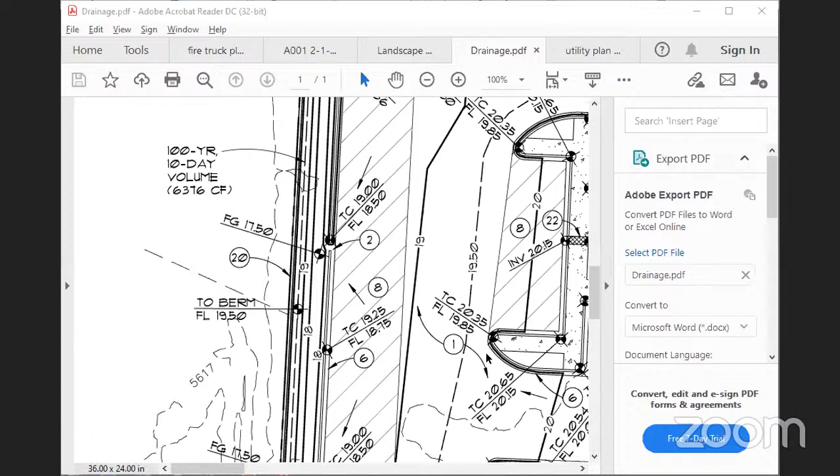I'm sorry, I didn't get all of that. There's a little bit of feedback going on. So all of the water collecting in these ponds is going to be going down to where there's the gutter, if you will, where all of the water is released into. Right, yes, that's correct. Okay.

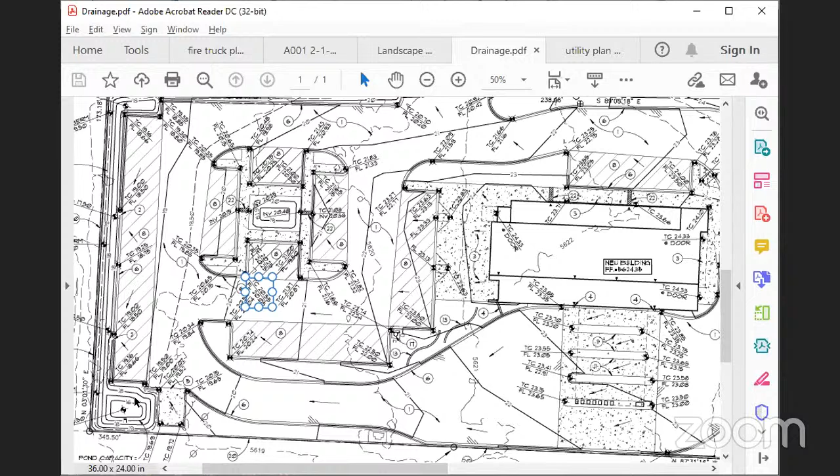Director Hubler has placed the plan on the screen if you need to refer to that. How big are the holding ponds being built? I'm sorry, how big are the ponds that are being built, the retaining ponds, the rain ponds if you will? How big are those? If you have access to the screen, Director Hubler has posted that up there so you can see.

There's a dashed line that indicates the extent of the 100-year storm volume, but the majority of the ponds are right next to the west border of the property. Okay, where the arrow is going around? Yeah, okay.

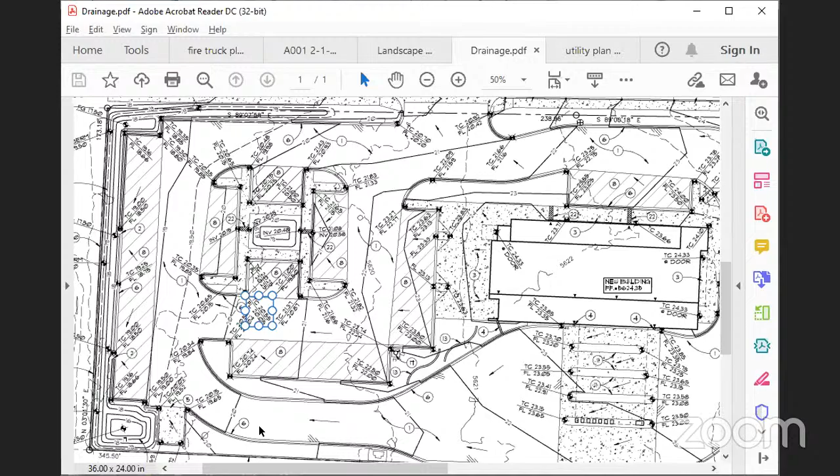Do we have any others? I thought I saw someone else coming on. And then I see our city manager, Javier Martinez, on the line too. I'm sorry for not recognizing you, City Manager Martinez, but thank you for being with us. Thank you, Commissioner Martinez. Pleasure to be here.

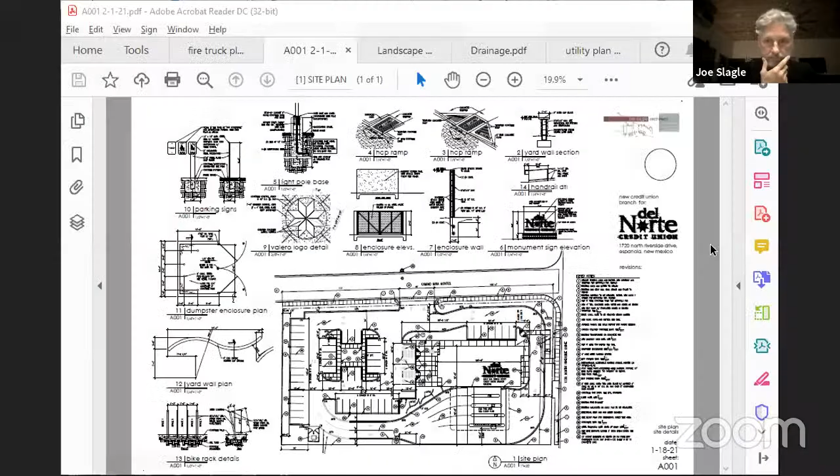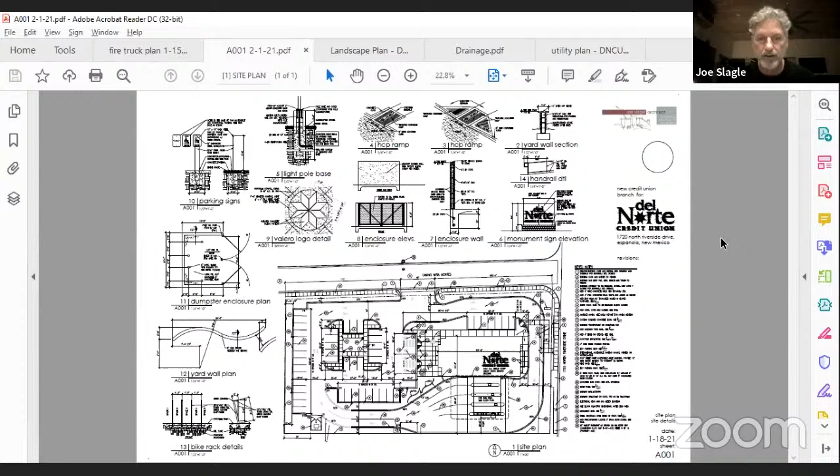So what I would like to do, Richard, if you would, could you screen share the site plan, please? And then I can kind of just go through the things that we've adjusted since the last meeting. Mr. Slagle, do you expect Mr. Wilger to provide any testimony? I don't know if he would. Is there anything any of the commissioners would have questions for the contractor about? I don't think so. If we do, or if we have questions for him, we'll swear him in prior. Okay, all right, thank you Richard. If you would, please, yeah, zoom in a little bit.

Okay, very good. So just quickly, the concerns from last time, I'd like to start at the top and make my way down to describe what we've done. The first one, we had a concern last time that the driveway location on the north side was lining up with one of the property owners on the other side of Miramonte. We've adjusted the entire site to move that driveway to the east to adequately displace it from being directly across from their driveway.

So hopefully this will alleviate that concern. The other concern from the property owner on the west, they wanted more buffering on the west side. We've added a concrete block wall 6 feet high, and we've also increased the distance from the parking to the property line, which is now over 10 feet. That's a landscape buffer and ponding area with a concrete block buffer wall to the west. I think those were the two neighbors that had commented last week, and I think we've addressed those comments.

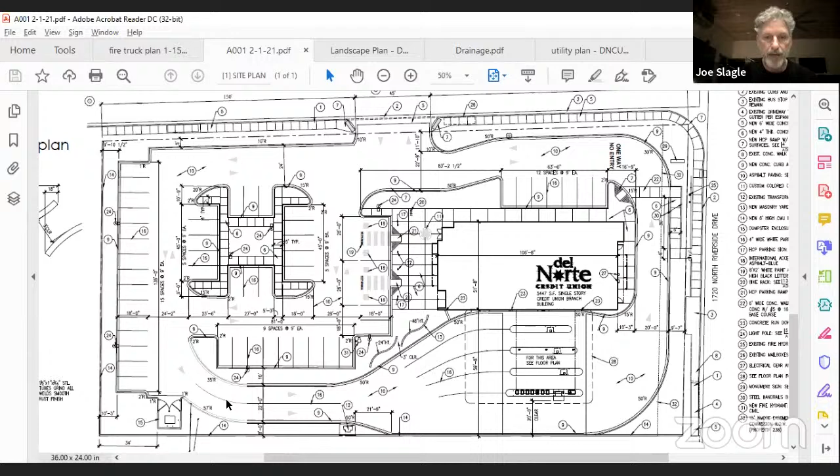Moving further to the south, there was some concern about the backup at the drive-through lane. We've widened the drive-through access aisle to 20 feet. I think that was one of the commissioner's suggestions, allowing 2 lanes of traffic through the access drive to the drive-through lanes, which has increased our drive-through capacity and backup capacity significantly.

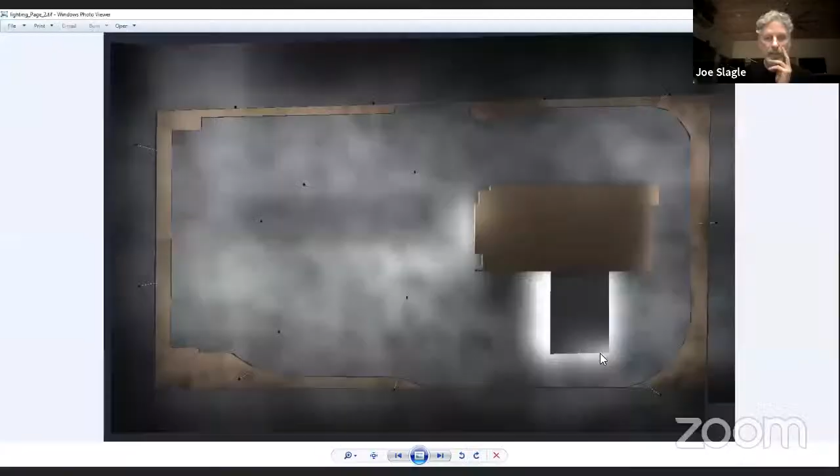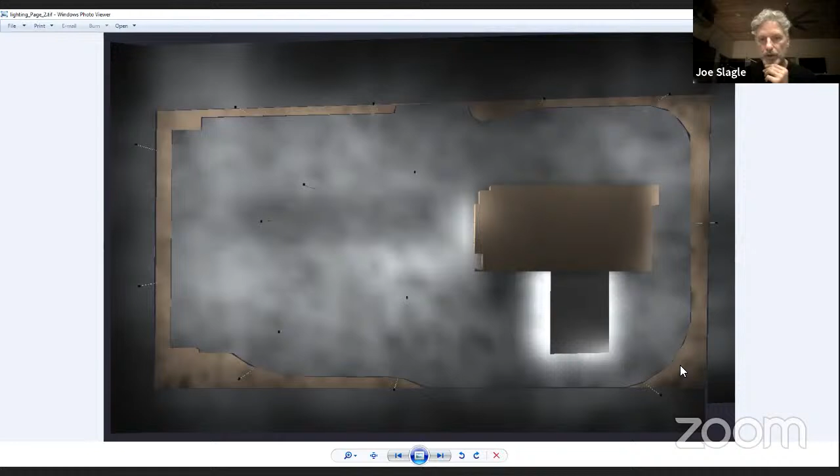Let's see, some of the other concerns were lighting. I wanted to make sure that we had adequate lighting on the property and also had cutoff ability for those light fixtures on our poles so that they don't spill off onto neighboring properties. We have a photometric that was done that addresses that problem. You can see there's our photometric, showing the lighting levels that would occur on the property. On the west side and south side, it is cut off. There's some that bleeds a little onto the street and a little onto Riverside, but the lighting is contained within our property.

I think that, other than the grading concerns, addresses the problems. There was one comment on the landscape plan about buffering on the west side and also adding a tree at the bus station, and we have done that. So we've added a shade tree at the bus stop. I believe one of the commissioners had that concern.

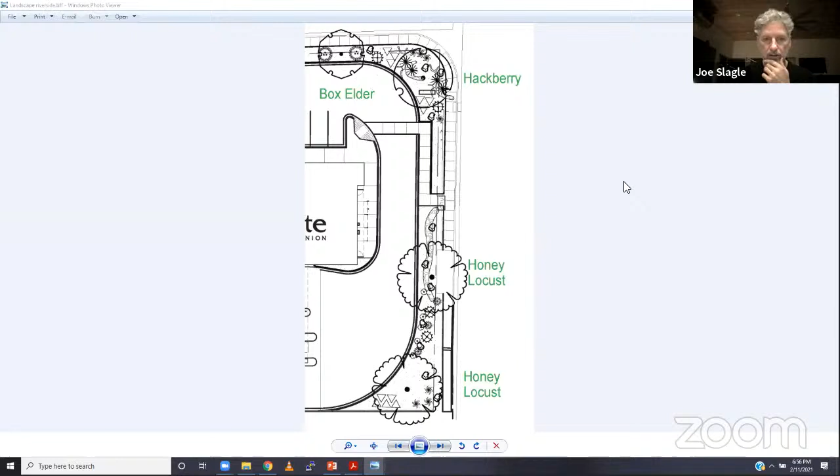I believe that addresses the concerns that I'm aware of. If there are others that I missed, please bring those up. But with that, I'll open the floor for questions.

Thank you, Mr. Slagle. Appreciate that. I do see here on my list that the mailbox relocation was another issue, and maybe Director Hubler might be speaking to that too. Is that correct? Yeah, I'll be speaking to the mailboxes.

Thank you, Mr. Slagle. I'll go ahead and ask the commission if they have any questions for you. We'll start with Commissioner Martinez. Thank you, Mr. Chair. I have a question on the signage plan, but I think Director Hubler may be able to answer that question with his presentation, so I will wait.

Commissioner Casalos, do you have any questions? Mr. Chair, not at this time. Thank you, Commissioner Casalos. Commissioner Vigil? Mr. Chair, no questions, no concerns.

Commissioner Wright. Yes, Mr. Chair. I'm looking at the landscape plan that shows the vehicle stacking. For the record, could you say what size vehicles were used to illustrate that? Yeah, those are 18 feet long. Okay.

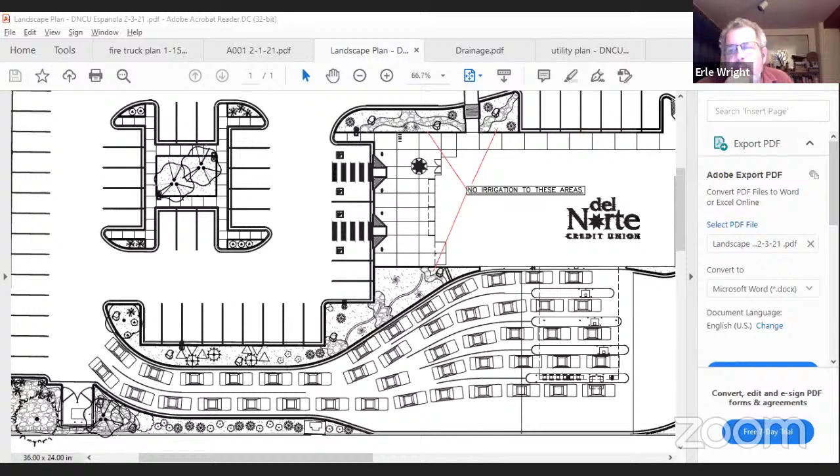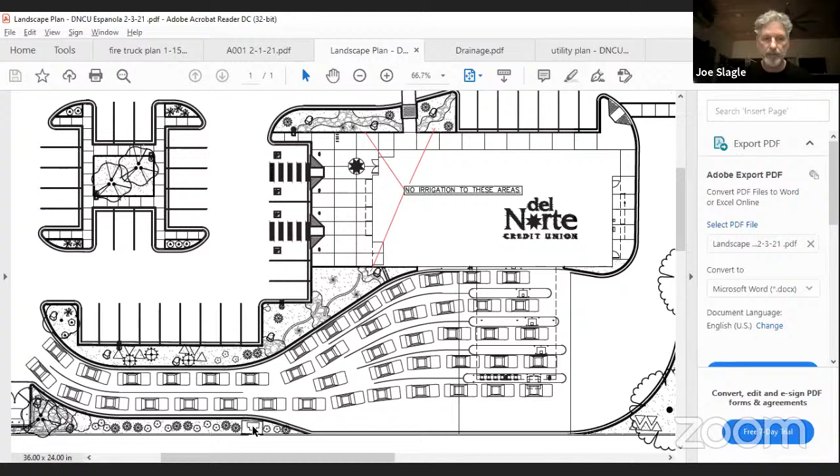Oh, I see what you're saying. In the double lane aisle approaching the drive-throughs, yes, the south lane. It could either be—what you're looking at is an extreme. I don't know if we'd ever get to this point, but the south lane could be used if you turn right and went on out. It could be a bypass lane, so it could be used as either. Obviously, we can't pull that back any further. Just to the left of the southernmost, where the cursor is, that's an existing transformer, and that is limiting the widening of our lane right there. So that's something we had to work around.

Understood, I realize there are site constraints there. But so the intention is to allow stacking in both of those lanes? If it's required, that's correct—in a very, very busy situation.

I don't know, I guess it'll be a question for staff coming up, but I would almost like to see that actually painted as pass-through only, or indicated that way. Because as your plan shows, that's only providing access to what I assume is an ATM station—is the fifth station out? The southernmost drive-through is an ATM, that's correct. Okay, so again, not like a fast food restaurant—that'll actually be a pretty quick transaction for the most part, either deposit or withdrawal of cash, so that should be pretty quick flow. That's correct, yeah, I don't think you're ever going to see that much backup behind an ATM.

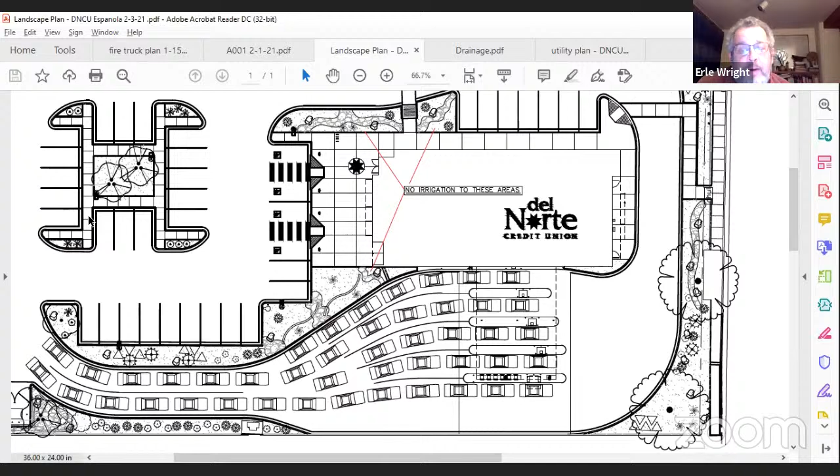I've actually seen them during these COVID days because the banks have been closed. It's a problem we've seen manifest in other developments in the city, even at the branch on the west side of town, where the backup flows into the parking lot and people are unable to leave their parking spot because of vehicle stacking at some of these drive-through locations. But this is good, there's 4 windows and an ATM, so I definitely appreciate the improvement from the last plan. Thank you for that.

Yes, sir. And also appreciate the consideration for putting the shade tree adjacent to the bus stop there. I think that will be very helpful for the community.

I am a little concerned about the retention area still, and the ponding and the landscaping there. Did any of the plant materials change on that west side from this plan to the other?

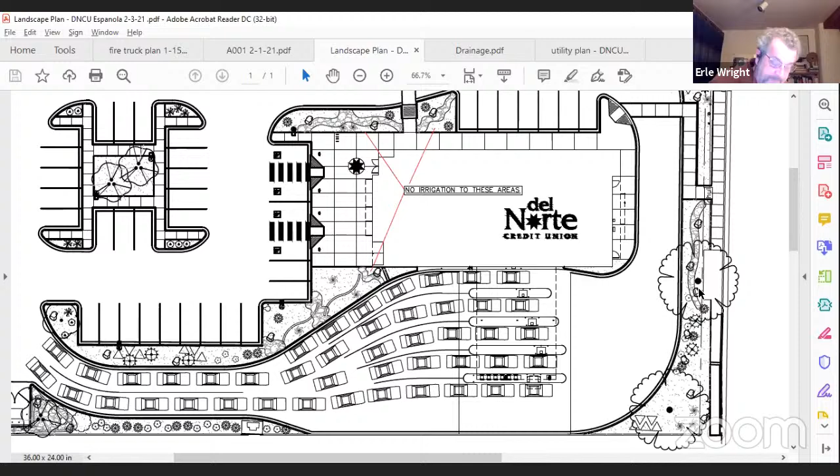I'm sorry, I'm rattling my papers again. Richard, can you pan to the left a little bit? Thank you. Yeah, there's been some plant material added on that west side to help buffer that ponding area. I think you can see there's more room over there now, so there's been some more plant material added in there.

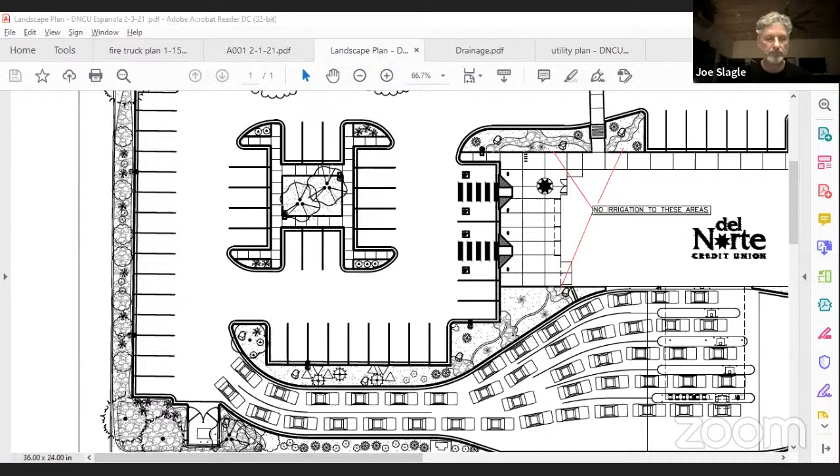Yeah, so I guess I'm a little confused. The gray is stone pavers, I suppose? Yes, that's gravel and gravel over riprap. Okay, gotcha. Right. And so the actual plant material...

I'm still having trouble identifying it. Yeah, I don't have it at that end. I think it's the curl leaf mahoganies, or mountain mahoganies? I believe that's correct.

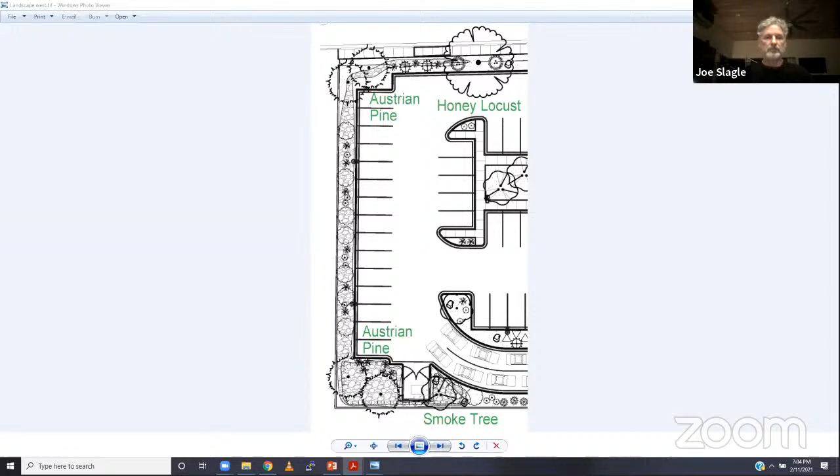And again, are those suitable for saturation in the retention pond? Well, we've asked our landscape architect that designed this, and we've informed him that that's a pond. I'm not a landscape architect, so I've got to rely on his expertise. He indicated he would provide plant material appropriate for that location.

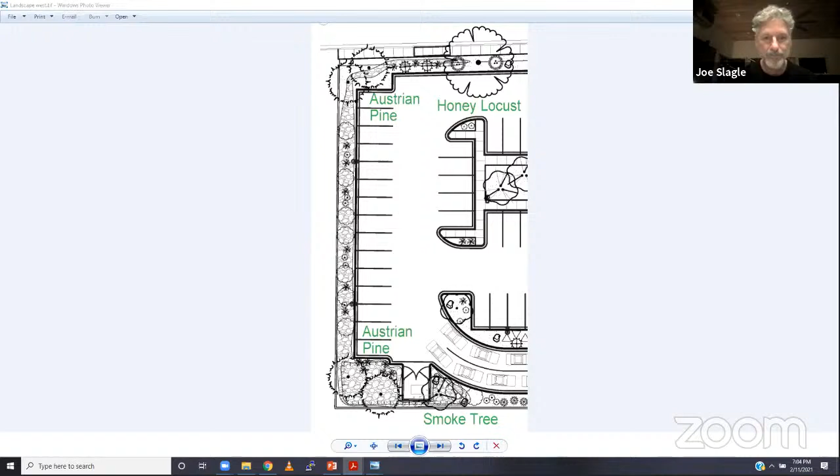Okay, well, sorry, that was a little tough question, but I'm not sure myself. It's indicated as low water usage, but it could end up being saturated. But I guess that concludes my questions, Mr. Chair, for the applicant.

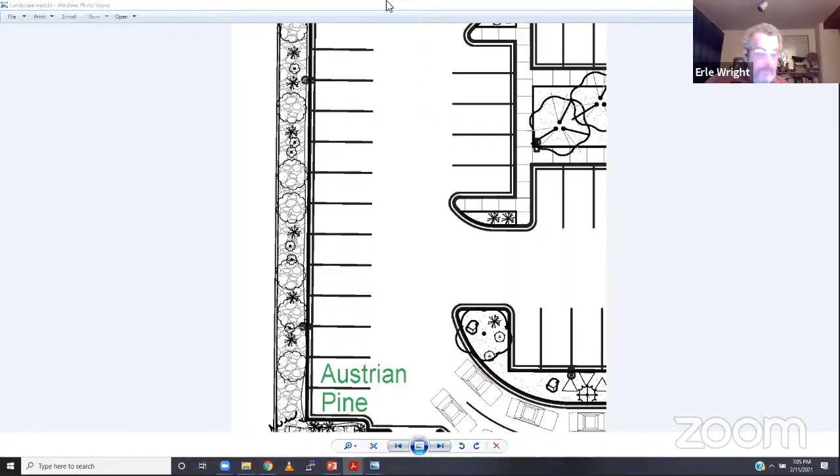They ran through all the commissioners, am I correct? So just me, I'm the only one left. I don't have any questions, Mr. Slagle, but I do still share some concerns about the stormwater, given the underground geotechnical conditions. I'll reserve more questions for staff on the potential solutions there. So if there's no further questions from staff or the commission, I'll move on to questions from staff for the applicant. I have no questions for Mr. Slagle. Thank you, Director.

All right, we'll go ahead and jump to the neighboring property owners. If you have any questions for Mr. Slagle or his team, we'll start with you again, Ms. Hicks and Ms. Martinez. Can I look at the north side where the exit is? I couldn't quite see the fire hydrant, I just want to see where that aligns. Director Huber is working on that right now.

Back up on you. Give us a second here. I did have another question too. Okay, so there's the main entry. Yeah, it's still pretty close to across from where my house is. I don't know if you see that, where my driveway is.

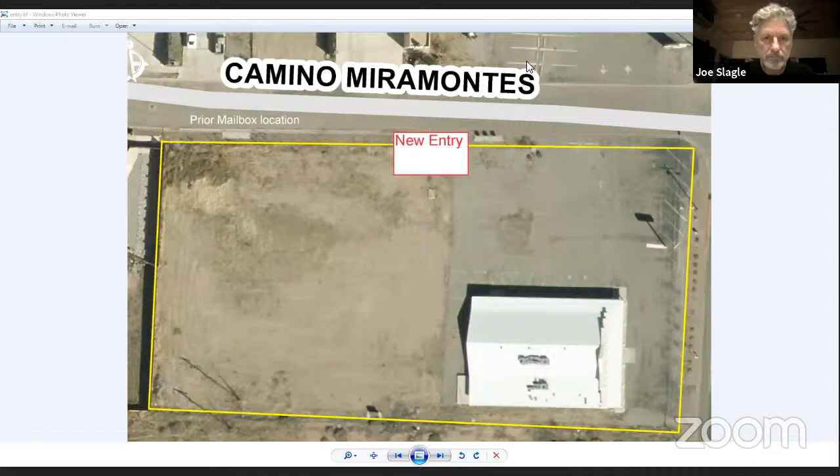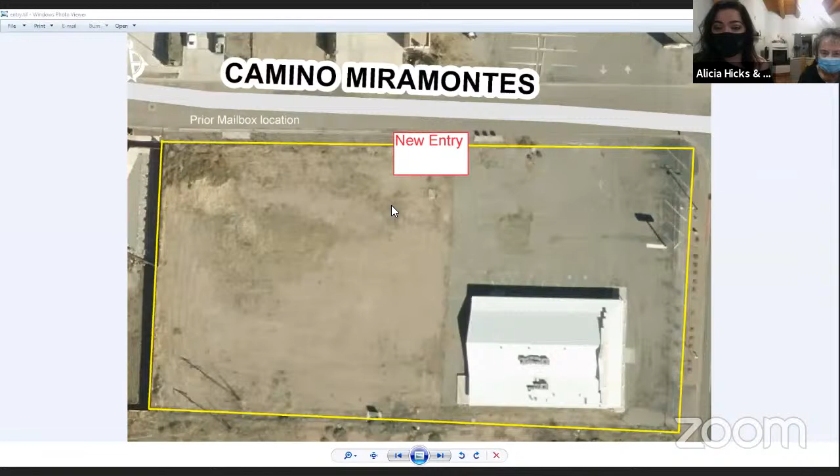It looks better. Obviously though, if you're looking at probably, on average, 30 vehicles coming in and out in a 10-hour span per day of an average work day, that's 300 extra vehicles per day going in and out of there.

And you said there was no way you could get the exit onto Riverside. That's correct. Our first site plan showed a driveway onto Riverside, and I share that concern, but we were unequivocally denied that by the New Mexico Department of Transportation. So that's out of our control.

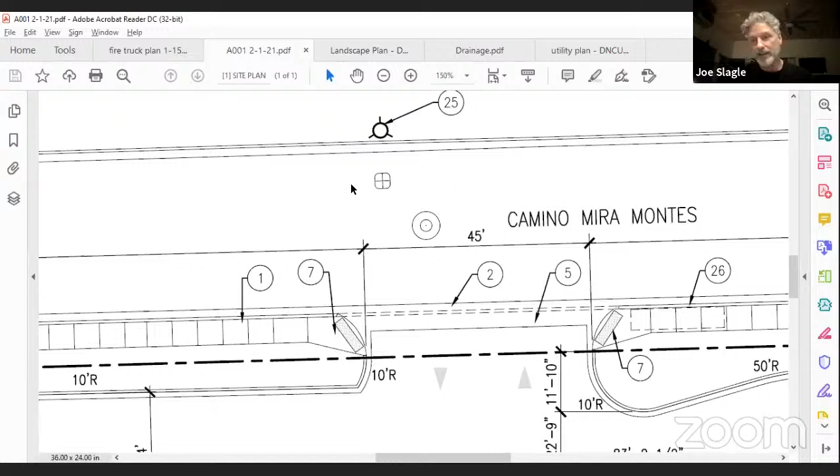So that is actually further west than that. Actually, the other image that you showed is pretty accurate then. There's no way to move that over just a tad? Because if you look, that lines up pretty much right with my driveway.

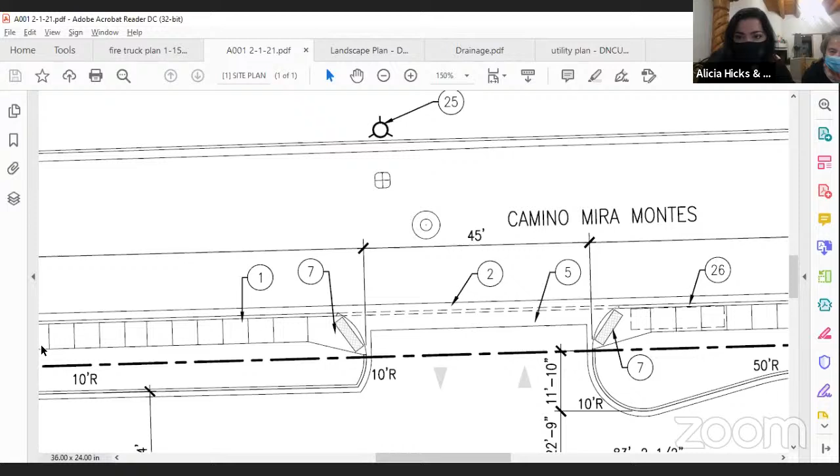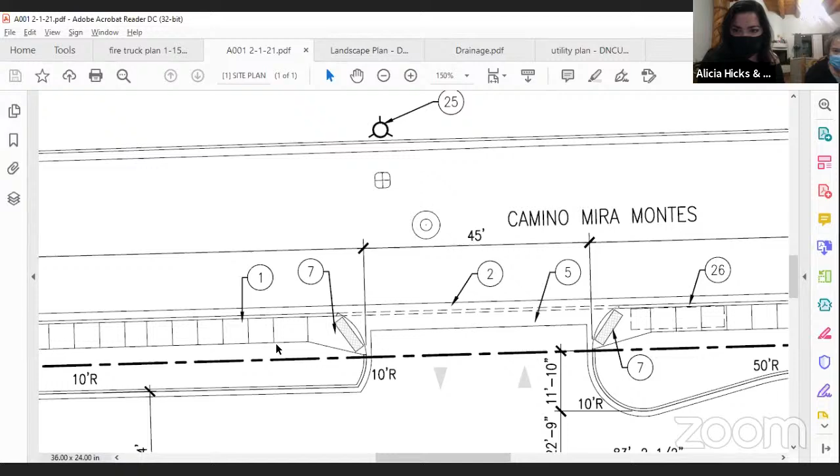People are going to be, you know, if I get a package delivered to my front door—not saying that the people who bank there, because I bank there, are going to do bad—but people might want to take that package, you know what I mean, seeing something there at my front door. So is there any way to obscure that view just a bit of my front driveway, without me having to be inconvenienced building a fence and all kinds of stuff out of my pocket, having that expense?

We got the landscape plan showing the trees and the landscaping scheme on the screen right now. I don't know if you want to address that, Mr. Slagle, and how that might provide some additional buffering.

The only thing I can say is that based on that concern, we pretty much redesigned the entire site, moved the building, moved the parking, moved the driveway, and completely redesigned the grading plan to accommodate that request. As we push that driveway further east, we lose parking spaces, and we're down to pretty much the minimum number of parking spaces that Del Norte feels comfortable having without people parking out on the street. I think we've made a genuine effort to accommodate that requirement, and I'm not sure what else we can do from this point forward.

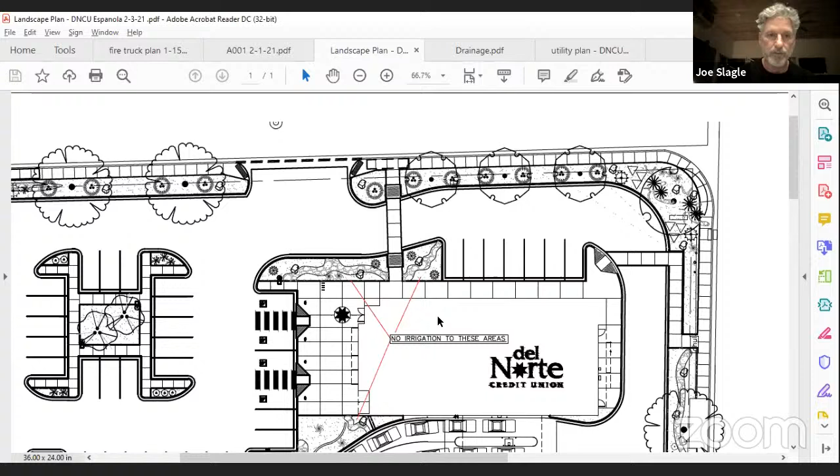This is Dave Whitehour with Del Norte. Can I just make a comment about the redesign? I appreciate the redesign, I'm just saying, is there any way to obscure more of what people can see? I do see that you guys put trees and landscaping and stuff, but I still feel like people have a real easy line of sight to my front, not only my front door, but my front window. If you actually look at an aerial view, you can see my front window, and I will be able to see right into what cars are coming in and out of Del Norte, based off of where my front window is by my kitchen.

And I appreciate your concerns. I just want to give a little context here. Del Norte is a not-for-profit organization, so the funds we're using to build this branch come from our members, and we have a fiduciary responsibility to be responsible with them. The adjustments we made to this plan are adding an additional $220,000 to the price tag of this branch, and we've gone through this process now, this will be the third iteration of going through this. We've tried really hard to accommodate everybody's concerns, but we're at a point right now where if we have to continue making revisions, it's not going to be feasible for us to move forward with the project. That would be really unfortunate, because our members in Espanola have been asking for another branch because we've outgrown the other one. So I just want everybody to understand, we're not a bank, we can't sell stock to get additional capital to make all these changes. We're at the very high end of our budget right now, and I'm just afraid if we keep adjusting, it won't be feasible for us to do this anymore.

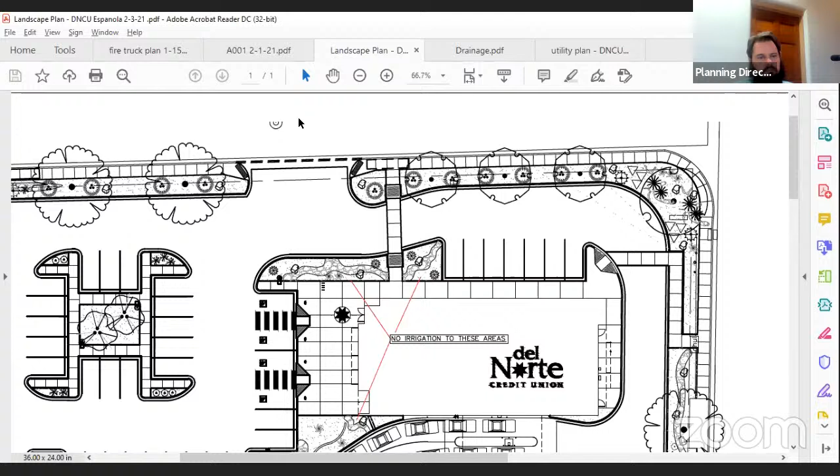We can look at it. I don't know how we would do that without obscuring people's line of sight for coming in and out of that ingress egress. I don't want to make it so that their line of sight is obscured for traffic.

Well, their line of sight would- I mean, if you put like a bush there, but I get what you're saying. But if they're exiting, they're going to be on the far right side. I'm talking about if you're looking at the north west side of that entrance and exit, having something there to obscure them from seeing my yard.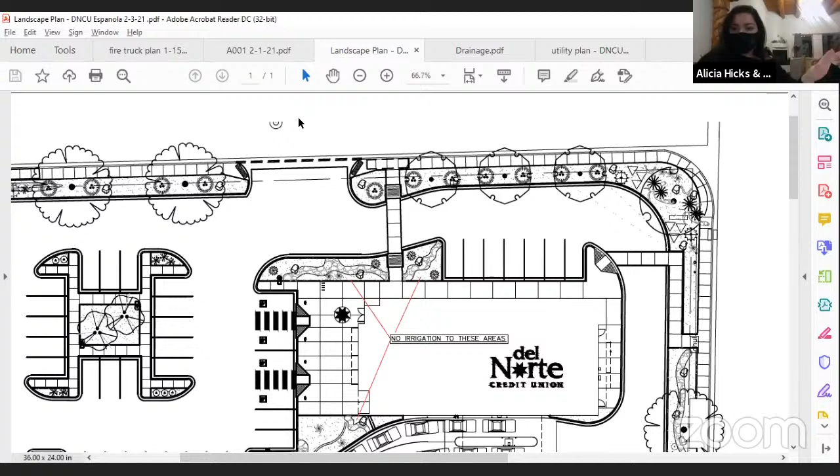There's actually 3 properties right there across that whole north side that needs something kind of buffering, whether it's plants, bushes, whatever. This looks like 2 big trees and that's it. No, there's shrubs underneath those trees. We've got shrubs, maybe you'll not be able to see them, but there's two.

I can see the shrubs, but in between that, I don't see anything. And then I don't see anything close to the entrance here. So that's like a clear view of my house, is what I'm saying.

You're maybe speaking more of like a hedge. Yeah. Something to obscure people from seeing my house, and seeing if I'm home or not. Something like a hedge that's continuous is what I'm hearing. Yeah. Okay.

Well, if that's something that can be considered, it doesn't sound like I'm hearing any kind of commitment or answer from the applicant. So for the sake of time, we'd like to move on to additional questions, unless Mr. Slagle or Mr. Whitehour would like to conclude anything on that point.

I mean, we can take a look at it. I just don't- I just don't want to obscure the ingress egress line of sight.

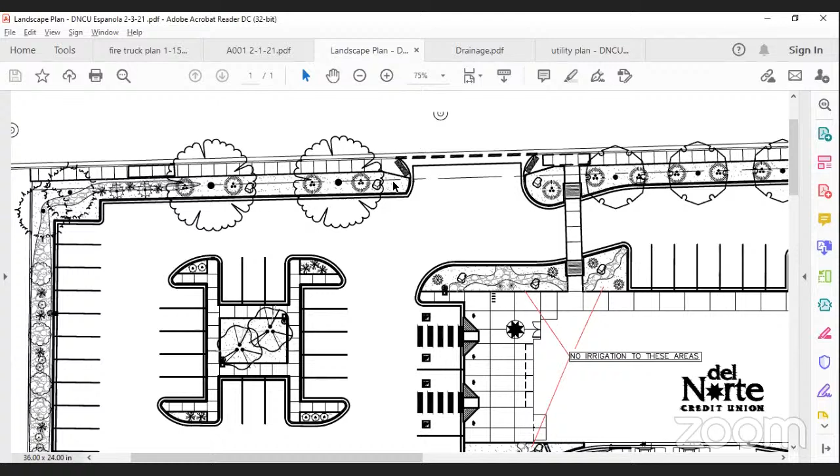Okay, Ms. Hicks or Ms. Martinez, do you have additional questions you might want to ask the applicant? I have a question. The space that's allocated for ingress egress, does that allow for only 1 car entering and 1 car exiting?

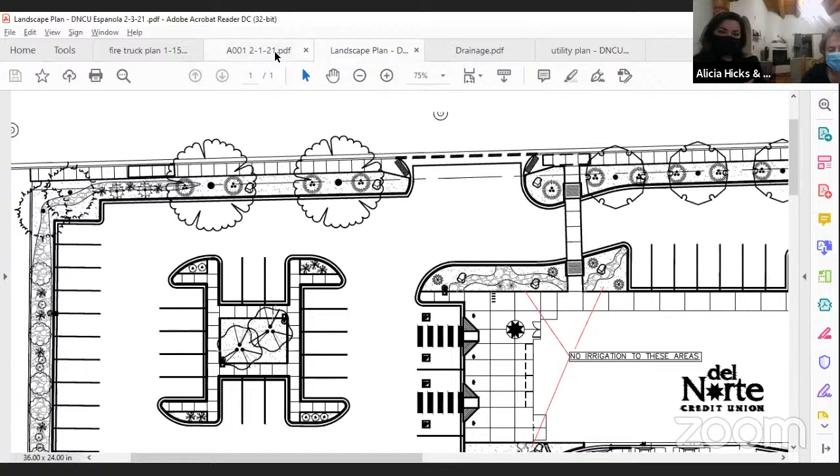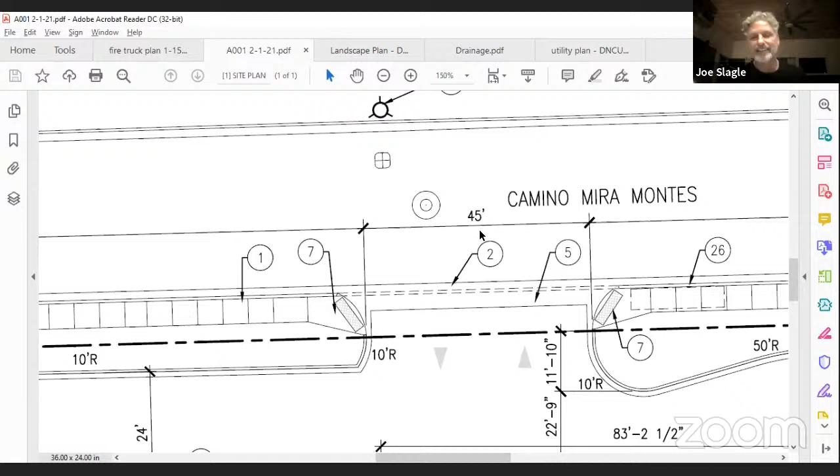Yes. So people exiting and making a right, will there be a stop sign there? No, there's no stop sign planned right there. So it's a free-for-all kind of thing. That's your condition - I believe the city has a condition for a stop sign to be installed. Doesn't necessarily require one, but it has been done just to help.

So my other question is, what is the distance between the exit lane and the stop sign at the corner of Mira Montes and Riverside Drive? 152 feet. Excuse me? 160 feet. Which is- 152 feet. Oh, 52. It's right there. Which is the equivalent to how many cars?

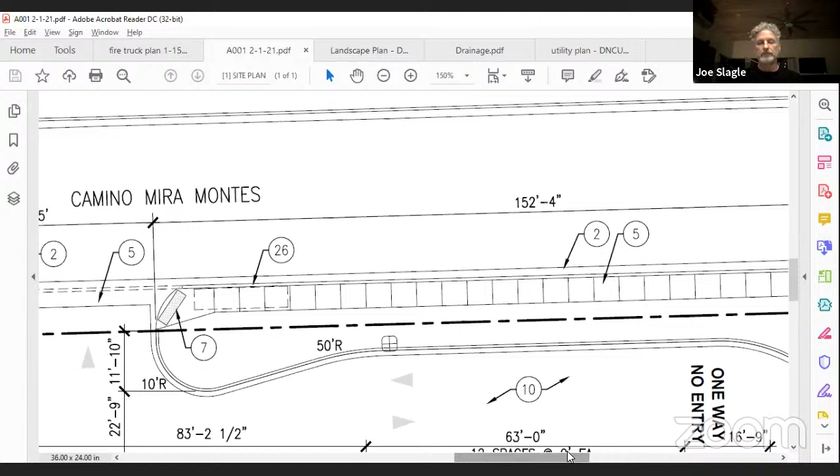You allow for about 20 feet per car. So that's what, 75 cars? No, no, 7 cars. I'm sorry, 8 cars. 7, 8 cars. How many? 6, 7 cars. You said 20 feet per car? Yeah, I think that's like 8 cars, that's like 7 or 8, depending on if it's a truck or a vehicle.

Well, I guess there's enough space. I'm thinking about the back lot. Okay, that was my question. All right, thank you.

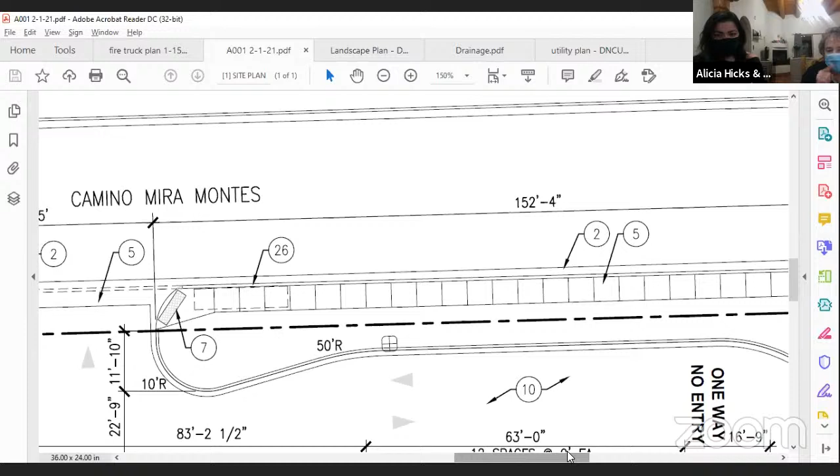Any others? I have another question. So everybody that's at the drive up needs to go around the building on the east side and partially on the north side to exit, is that correct? It's the same exit and entrance. Yeah, so there's one exit, one entrance, they go around this way, around the building to exit?

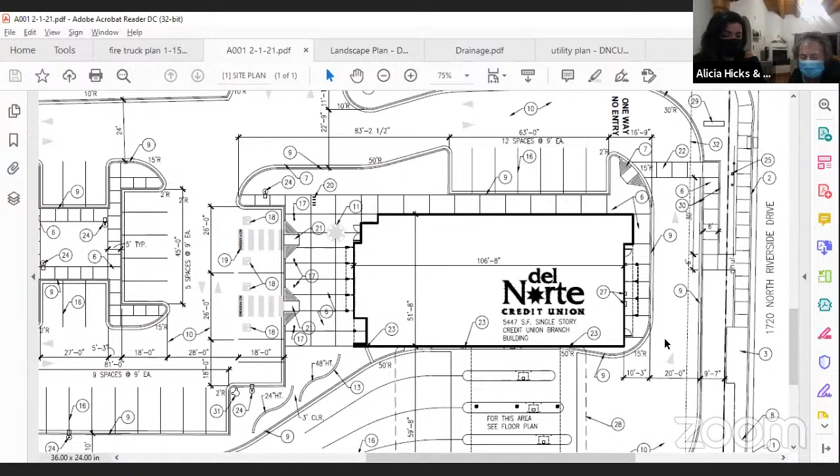Yeah, okay. So, and there's how many lanes? 5? It's like 5, there's a lot of lanes. Yeah, okay. There's 4. Okay, 4 lanes. I have no more questions. Okay, thank you.

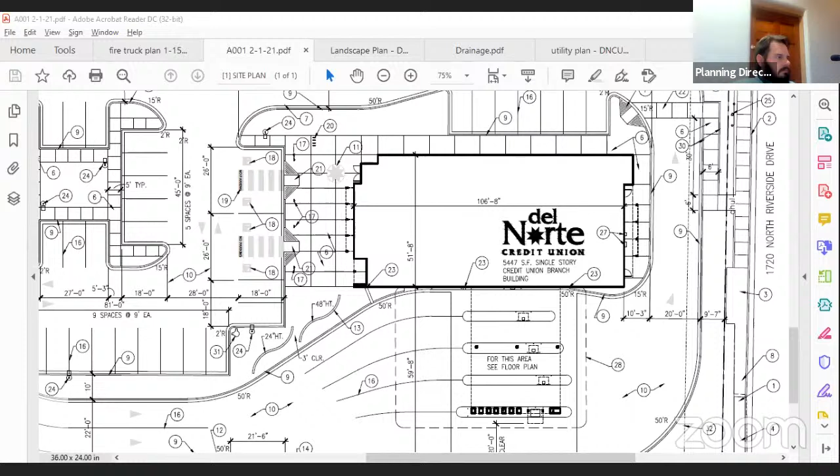Let's see what I got next on my list here. Mr. Lujan, do you have any questions for the applicant at this time? Yes, sir, I'm just curious. So on Camino Mira Montes, is that the entrance or just the exit for the bank?

That's both, that's our main driveway. What about on Riverside? Is there an entrance on the Riverside side of the property? No, we originally proposed that - you may not have been part of that discussion - that was denied by the New Mexico Department of Transportation. The Highway Department would not allow us to have a driveway directly onto Riverside. Did they say why?

I don't remember the exact reason, Richard, maybe you can step in. I'm not sure exactly what the reason was, but they're not allowing them anymore. I don't think any new development on Riverside is allowed to have a driveway directly onto Riverside, but I'm not sure what the reason is. I don't know if it's causing congestion or problems they've had in the past. I know every property along there has them now, including this one, which we're having to close up. So we had assumed we would get that driveway, but as we were going through the approval process, we were informed we weren't going to be allowed to have it. I'd just be curious to know the reasoning behind it.

I work for NMDOT in traffic safety, so if I can be of any help to speak with anybody to get more information regarding why they denied it, I will. My main concern is that our neighborhood is basically one huge cul-de-sac, and the only entrance and exit is on Camino Mira Montes. It's going to create a lot of traffic in our neighborhood, and there are a lot of kids that play on our street. So how will the credit union control the amount of traffic flow on our street? There are a lot of small children and families walking up and down. What can the credit union do to keep our neighborhood safer from the increased traffic?

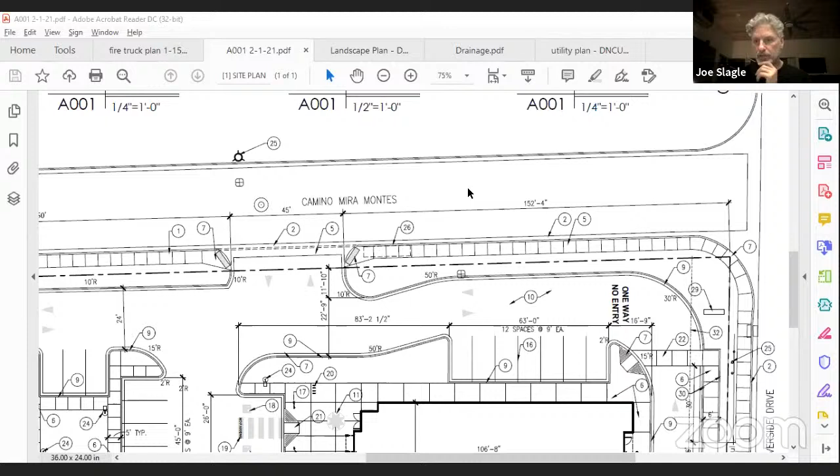John Wilger, if you're still on—yeah. I know you had some discussions with someone at NMDOT. Maybe you could weigh in on what the reasoning was.

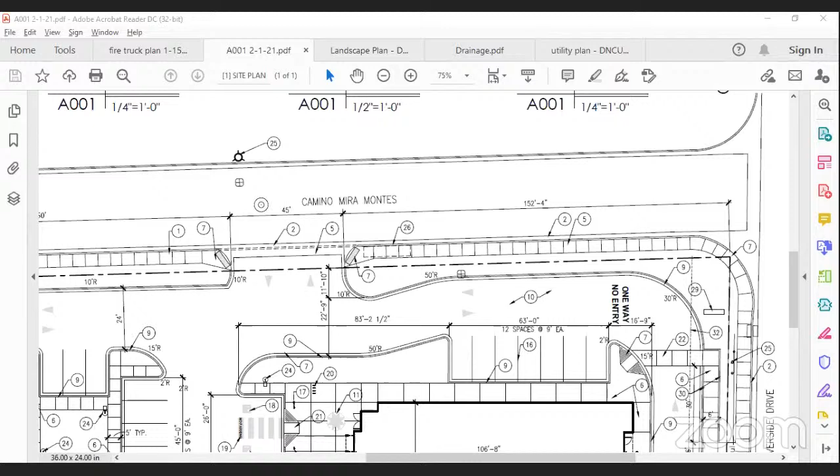No, I just share the same concerns as the others, as the safety. I've been in this neighborhood for 20 years, and my kids have grown here and still continue to grow, and we have a very growing family, if you will, in this cul-de-sac alone, and it just raises a lot of safety concerns. I'm a nurse in the emergency room, and I too can attest to many traffic accidents that happen when we seem to bottleneck traffic the way that it will be at the end of our road.

Okay, thank you. All right, thank you, Mr. Slagle and Mr. Widauer, appreciate it. We'll go ahead and move on. I think I captured everybody on the screen here. So we'll go on to the staff presentation. Director Hubler.

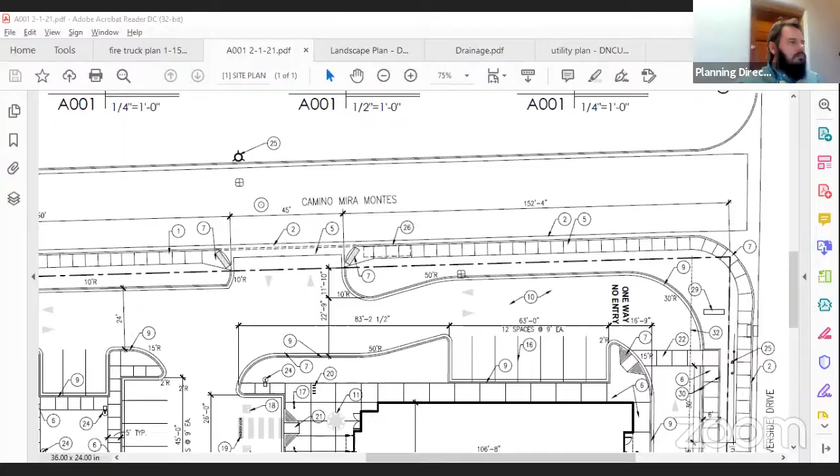Mr. Chair, thank you. I'll run through a number of items here and then comment on a couple of the questions. Apologies, I was noting them, but if I miss any of them, please feel free to ask me again. As indicated before, this is a revisit of a site plan to install a credit union with drive-through branches, or drive-through lanes rather.

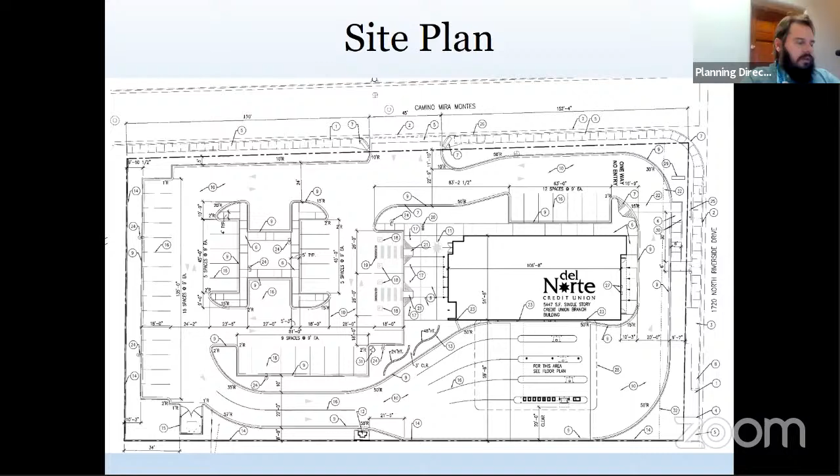This site plan, as Mr. Slagle indicated, has been adjusted. You can see the parking island change shape a little bit. The pathway for the traffic has been expanded to allow for more stacking along the drive-through lanes, even excluding, if we were to stripe that far south lane as an ATM-only lane. Not saying that drivers in this community would follow those directions, but it's worth a shot. Even taking those cars out of the stacking diagram, we still have 30 to 31 average vehicles entirely within the drive-through and out of the parking lot, which I think was a major consideration of the last time.

So as indicated, that drive has been widened to 22 feet to allow the double stack, with a total potential of 45 vehicles, including a long line for the ATM or for folks bypassing the line, as will likely be the case. The entrance to the street is 45 feet wide. So the question was asked if it allowed entrance and exit. It's designed for one vehicle at a time, but that's a very wide entrance, and that's on purpose to allow for maneuverability, particularly of the ladder truck. We'll see that diagram on the bottom here.

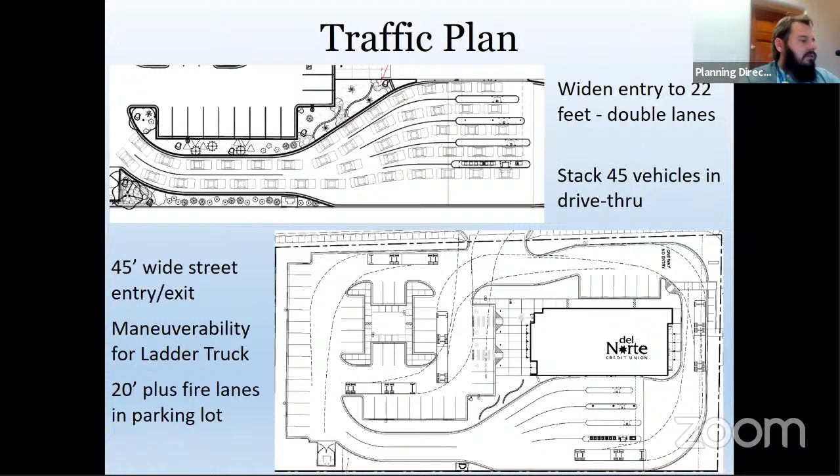This is the updated version. Apologies, the incorrect version was placed in the packet. It showed the old drive-through island, but the applicant did provide an updated version showing that the ladder truck, which is the largest vehicle that the fire department has, in kind of the worst case scenario, would be able to adequately respond. There is at least 20 foot wide drive lanes as it goes through the entire development.

The landscaping was enhanced. It exceeds, just as before, the code minimums. It does include landscaping in the parking island. There is, as discussed prior, a new shade tree by the bus stop.

I had a conversation with Delilah Garcia from NCRTD related to that bus stop. She indicated that they're going to petition DOT to put in one of their shelters at that location as well. Right now it's just a bench. She thought this would be a good time to upgrade that stop, and had no concerns other than general maintenance concerns.

Thankfully, the tree that's going there is a honey locust, which does not produce a lot of leaf detritus. And as indicated, this is one of our conditions: landscaping is always the responsibility of the developer, the property owner, basically adjacent.

So even though the public would benefit from that shade, the landscaping, maintenance, and upkeep would fall to Del Norte. There is, as we discussed prior, a deeper buffer to the west, about 10 feet or so. It's a combination of Austrian pines at the top and bottom, and then a mixture of mountain mahoganies, red leaf barberries, and yuccas as shrubbery in front of that block wall.

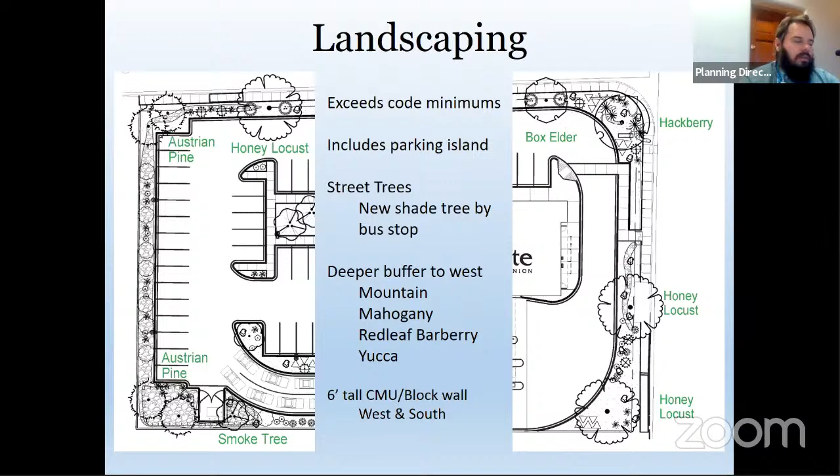There is, as discussed prior, a 6 foot tall CMU block wall, both along the western boundary and the southern boundary. It was prior along the southern, and the addition between last month and this month was to include it along the west boundary.

Looking at the sign plan, this is a request from last time. We did receive the application and the plan for this. Everything is within the expectations and limitations of the code. We have a total allowed square footage based on the street frontage of 548 square foot total signage.

Their monument sign meets the standards, and their combination of wall signs meets the standards as well. Those are generally limited to 10% of the facade, so that is again in compliance—another one of the checklist items from last month.

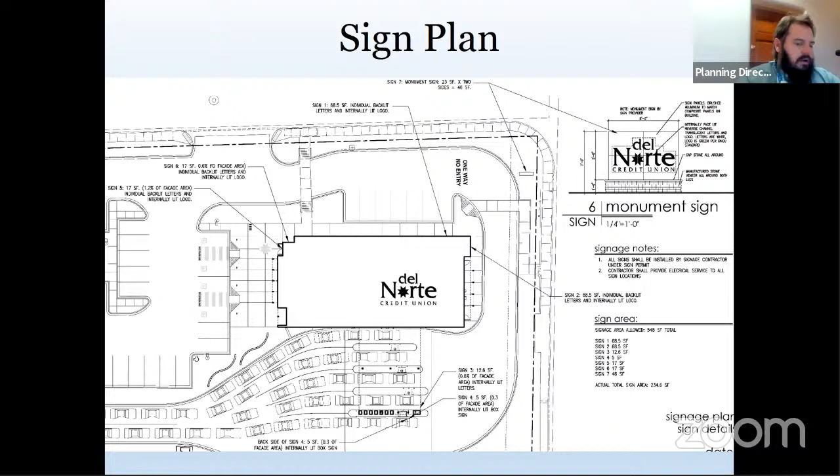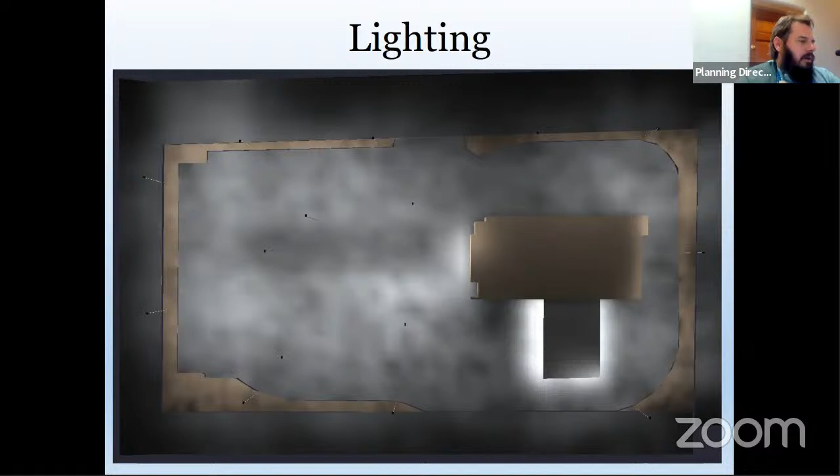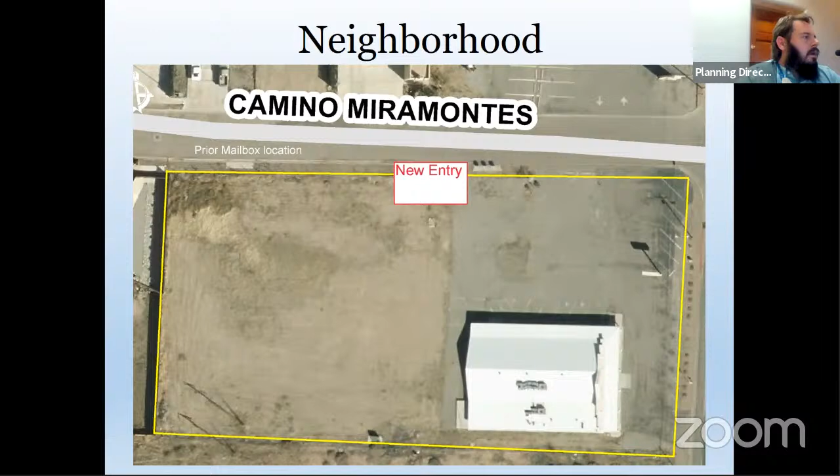Running through the review criteria for parking and traffic flow, there is adequate parking, including disabled or ADA compliant parking. There is circulation for the ladder truck, and as noted, the entrance was relocated to the east about 60 feet.

The stormwater drainage design does retain the stormwater on site. The original plan was accepted by the city engineer. As we discussed prior, the updated plan was reviewed by their engineer. I also had a conversation with the city's engineer this afternoon and got a statement that I'd like to read.

She says that upon further review of the development plans, it appears there's a berm intended along the west side of the development. They'll need further clarification of the grading to confirm the estimated runoff. However, with regard to the design detention volume requirements, industry standard is to allow continued historical discharge from the site.

That's the roughly 8,000 cubic feet we were talking about before. It would be the owner's responsibility to detain all developed runoff, the other 12,000 or so feet we discussed. Historical runoff can be equated to that runoff generated by the site prior to any site improvements. This is actually a condition of the state engineer that historical runoff be allowed to continue, as that's what recharges our aquifers and rivers. She concludes that SMA could work with the city and the development engineer to clarify rates and ensure adequate detention if necessary.

My recommendation would be, if we still have concerns as we move through the action on this item tonight, that we put that on staff and the city engineers to work with the design engineer to verify.

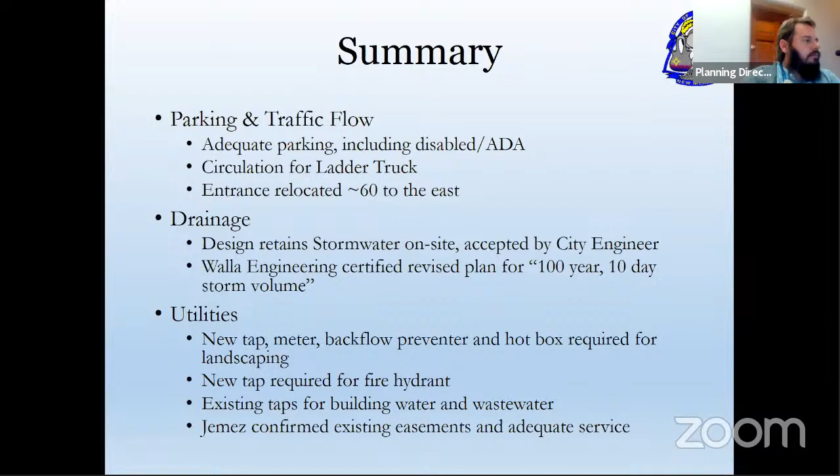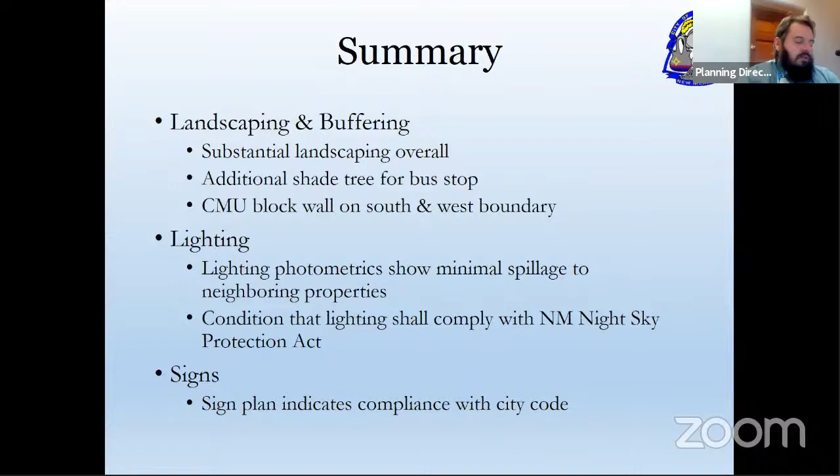As far as landscaping and buffering, there is, as discussed, substantial landscaping overall. We added the additional tree for the bus stop per the request at last meeting, as well as a CMU block wall on the south and west boundary to enhance the buffering. The lighting photometrics illustrate minimal spillage to the neighboring properties, and staff has a standard condition that the lighting as installed would comply with the New Mexico Night Sky Protection Act. The sign plan also indicates compliance with city code.

So we have a number of recommended conditions of approval. The first is a reworded version of condition one, that the applicant coordinate with Public Works to install the necessary equipment and install the fire hydrant as noted on the plans. The third condition was also revised slightly to say that construction is verified to ADA specifications by staff as it happens.

There is a condition we're recommending to install a stop sign at the exit to Camino Miramontes. As Chair Martinez indicated, it's not technically required based on traffic volumes. However, the city feels it would be a good idea and would help remind folks exiting the branch that there is cross traffic on Camino Miramontes from the neighborhood there.

Number 5 was also slightly reworded to complete the repairs and maintain the drainage pipe from NMDOT on the east boundary. Number 6 is similar, to maintain the on-site storm system. Number 7 is to maintain the landscaping, and number 8 is to comply with the Night Skies Protection Act. We were able to remove the recommended condition number 9 entirely.

Now I'd like to touch on a couple of topics, one being the drainage on the east. There was discussion at last month's meeting about whether we needed an agreement and what that would look like. The city's been engaged with DOT. The development of the property to the south, which has mostly happened in the intervening month to provide additional parking for Garcia, along with the knowledge the city had as part of this project on that drainage easement, highlighted the fact that that development probably impacted the drainage easement as it flowed across the tribal land to the south.

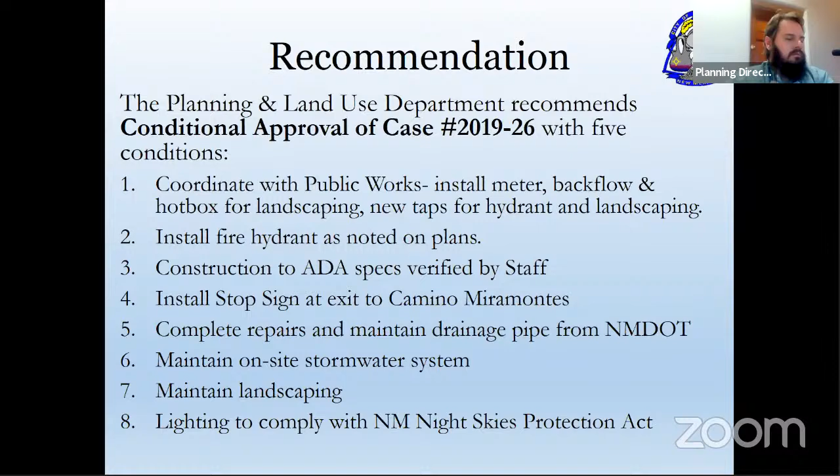Appreciate that. I'll go ahead and lead it off with a couple questions. One is just to appreciate your offer of working with your engineer and the applicant's engineer to further look at the remedy for stormwater detention on the site given the geotechnical conditions. I'd hate for the commission to put something so specific on it that we're tied to any one thing. I think there could be a multitude of solutions, and so that would be my recommendation. Is that something you'd be continue willing to do and work with them, Director?

Yeah, absolutely. Especially as the city, as was discussed by the neighbors, has been working on that road, and we have some concerns about the idea of overflowing, even controlled overflow, to the street. So we'd prefer to explore all potential options with our engineer and their engineer.

Okay, next question is about the monument sign. Given that there are signs proposed on the east side and north side of the building, and given that the building is pretty close to the street frontage on Riverside, would a monument sign necessarily be necessary?

So that's entirely up to the applicant. The city does not require any kinds of signage. We limit the amount of signage you can put, both by square footage and by particular dimensions. But absolutely, if Del Norte felt they had adequate signage on the building and wanted to pull that monument sign, they could. Our office is responsible for and has authority for approving sign permits and applications, and even if we permit a sign, we don't require it be constructed. We just require that if it is constructed, it meets what is permitted. So they could even get the permit for that sign and decide down the road, as they went through the building process, that they didn't need it, and pull it, and that would be fine with the city.

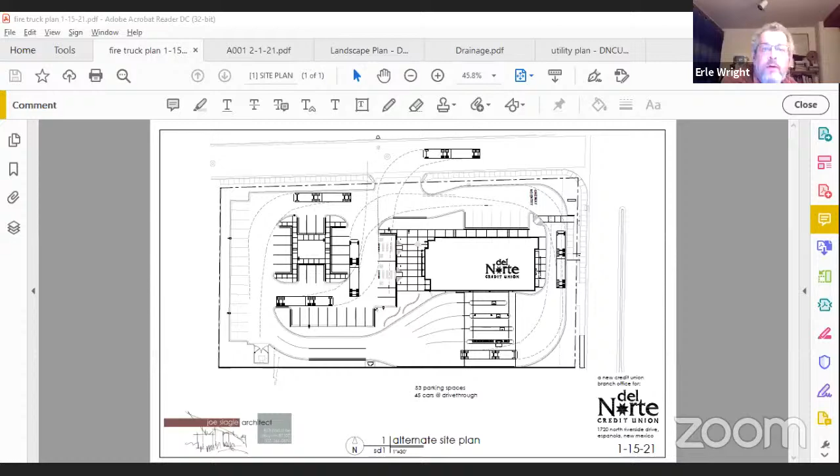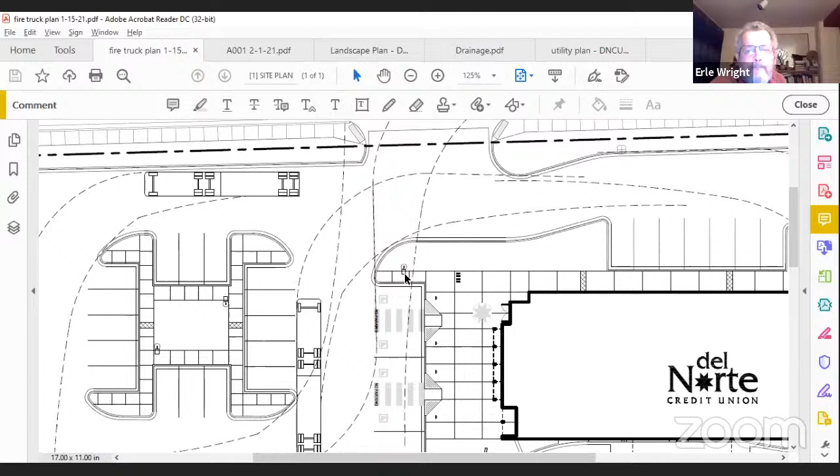That's showing the fire truck coming in, rolling over the handicap parking area, does it not? Yeah, I'm trying to follow the lines there. I'm not sure what's indicated by right where your mouse is. What's that square with the little light bulb on top of it? I believe those are lights. So that's a light standard? I believe so, yeah. Let me check another. Yeah, that's a light standard.

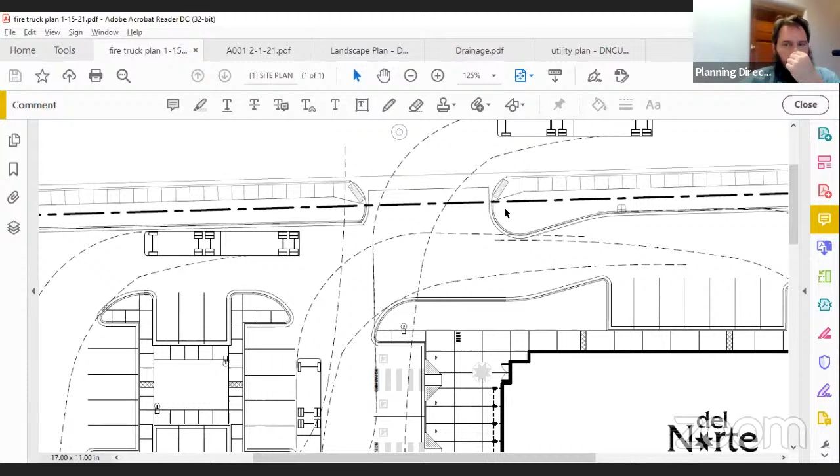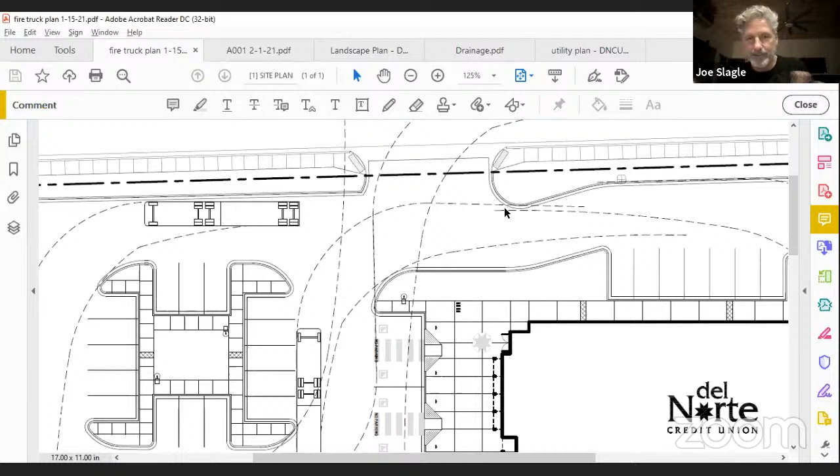The question that we had for the applicant around the fire truck diagram was to make sure that the radiuses permitted the turns, particularly as they made it around these corners of the islands and as they came in. I'm thinking, and I might refer to Joe here, that these are just carryover lines that were meant to be snipped off, showing that the turn in from the street, or the turnout from the street, made it through this entryway. Yes, if I might break in there, Richard, you're correct, and that's exactly what that is. It's a template showing the turning radius, and I can plug those in, but I don't have a standard template that shows it turning to the right and then to the left, or left to right. So the whole idea is just to show that you can make your way through the driveway and then turn again to the left. But those lines going down through the handicap parking are deceiving, and I apologize for that.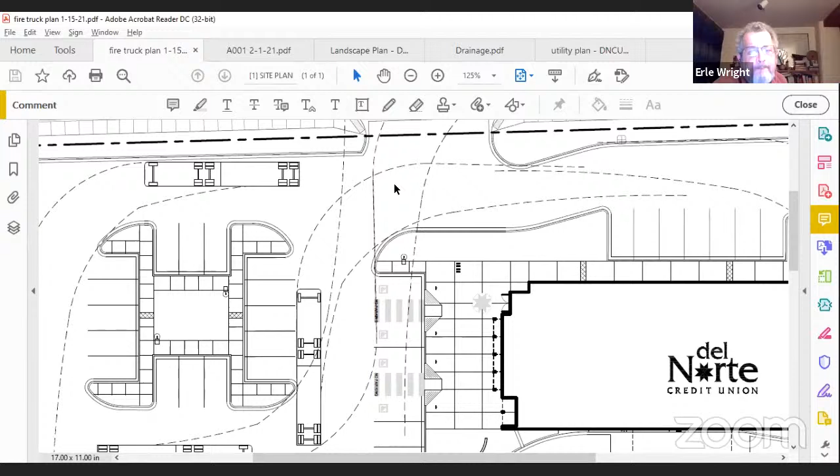Okay, because it appears that there's room for a truck to enter the parking lot there without having to do what's indicated on that plan. That's right. You would turn to the left and then turn to the right and wind up pretty much where that truck is shown there, either going south or going west. Okay.

Thank you for that, Mr. Chair and Mr. Slegel and Director Hubler.

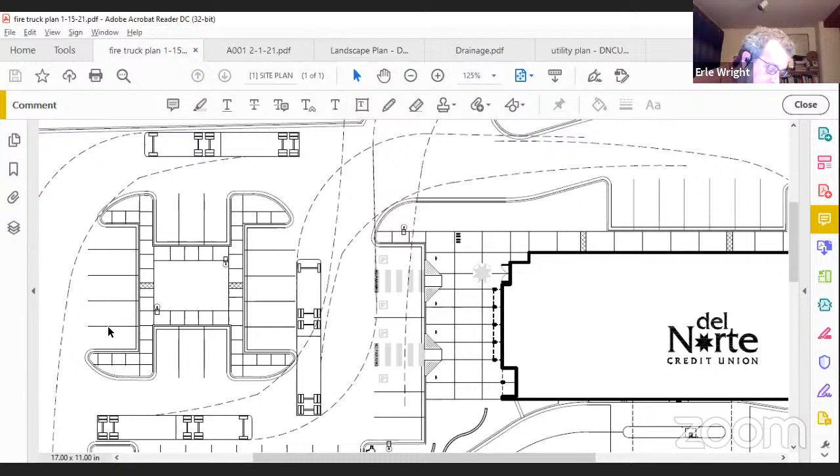So regarding condition 6 and 7, the responsibility for maintaining on-site stormwater drainage and maintaining landscaping, what exactly does that mean? You answered Commissioner Martinez's question regarding bonding. That was also a concern of Commissioner Quintana at our last meeting. Obviously that's not possible, but what sort of enforcement power is there for the city on that sort of condition?

The city has general enforcement power around landscaping. It's the responsibility of the developer to make a landscape plan that meets it and then maintain it. We just felt it was worthwhile mentioning, and something we'd like to do moving forward in all of our cases, because around town one of the things we run into is landscaping that is not being maintained. By having it as part of the condition of approval, it gives us a little more enforcement power to say, aside from not meeting the general code condition, you're also not meeting the conditions of approval that were granted for your development.

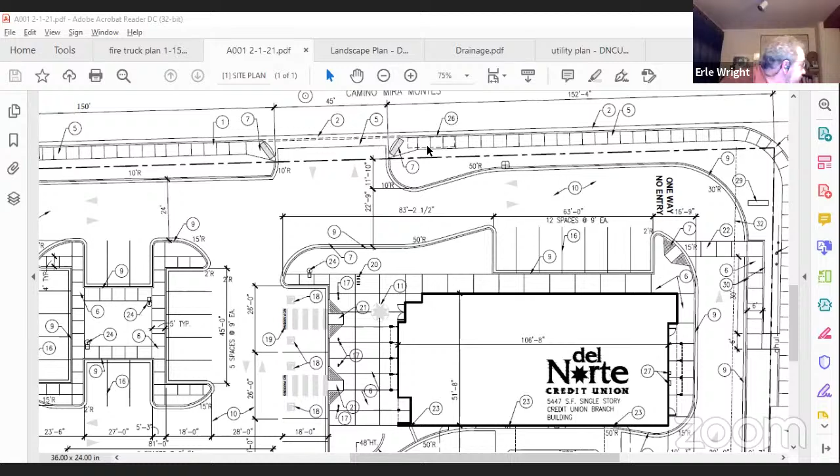Yeah, and their prior location was right in here. It's not indicated, but it's blocked out, and that may be where they go back to. It may be that the bolt pattern or whatever is not the same. That was why I went out and did the field visit and got those details to send over to the postmaster, because he couldn't get behind the fence. So then they'll work on determining how to relocate those. And like I said, they may go back onto that spot. If they don't, obviously that's going to have to be demoed as part of their sidewalk reconstruction, and we just put them wherever the postmaster says we can, basically.

Oh, I believe we lost you, Commissioner Wright. I see the lips, I hear no sound. You still with us, Commissioner? No. I think you're here, try again. No. How about turning off your video, Commissioner Wright? Maybe that might help. Oh wait, I think there he is. You're here, we got you. There you go, you got it back?

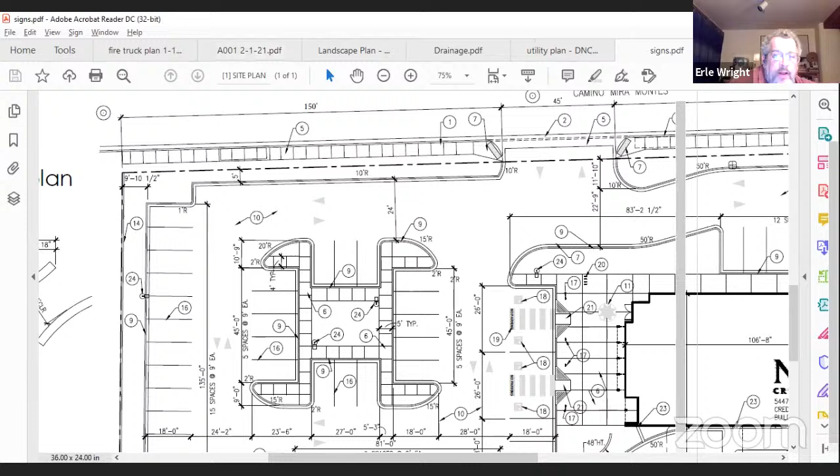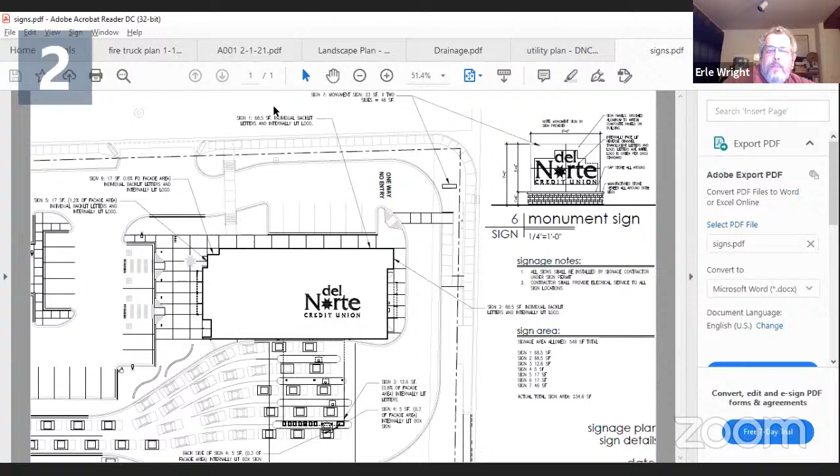Regarding the sign plan, is the signage proposed, which appears to be on- there's actually signage on 3 elevations of the building, plus a canopy sign, plus a monument sign. Am I reading that correctly, Director? I'm pulling that one up.

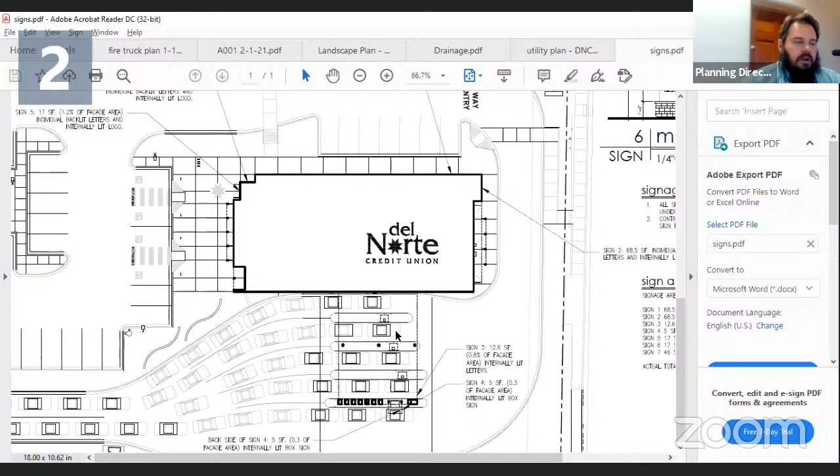And so, yeah, as we wait for that to get pulled up, does that meet the city sign requirements without a variance? It did meet. I did a review when the sign plan came through, and it does meet the requirements both for overall sign types, for overall sign allowances, and then for dimensions of each sign. And it does not require any special exception.

Okay, and then regarding the monument sign's location, does that interfere with sight lines at that intersection? It doesn't look like it would, but that's something we can check in the field as we get to that point, I guess. The requirement is 30 feet back from the street corner there.

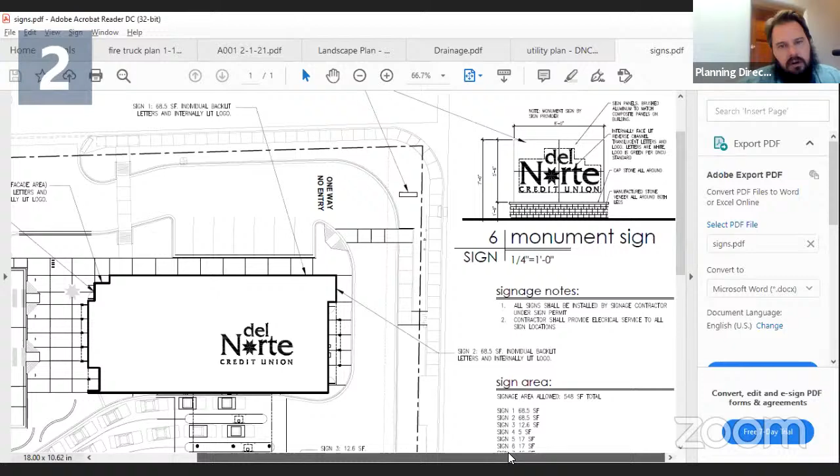And we can confirm from the center line of the street or the edge of curb? It's the edge of the curb, the edge of the street as continued to the curb. So basically it would be 30 feet back from this point here. This one I don't have the dimensions on, but it may be close.

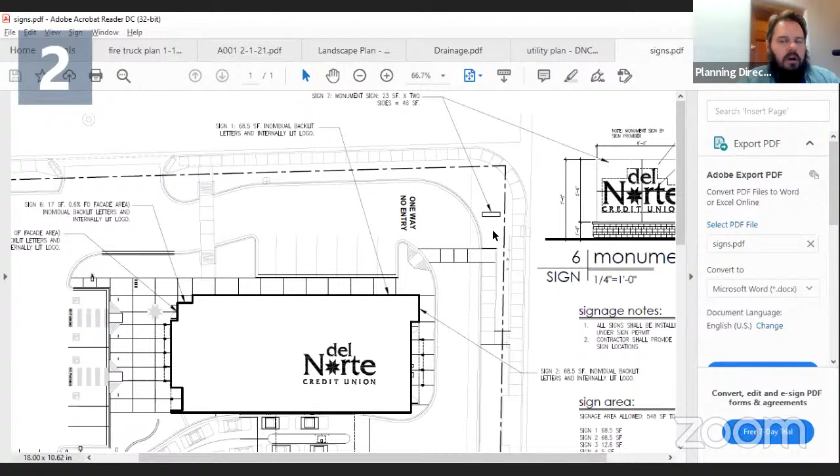It may need to be scooted a little bit south. That would be one of the things we would consider as we fully process their sign application. They've given us a plan, but they don't yet have a contract or anything set up.

So would a condition of approval be appropriate that the sign meet, similar to what we had at the last meeting, that the signage plan actually conform to the city requirements without special exception? Sure. Also that the monument sign not interfere with sightlines. Yep, sounds great.

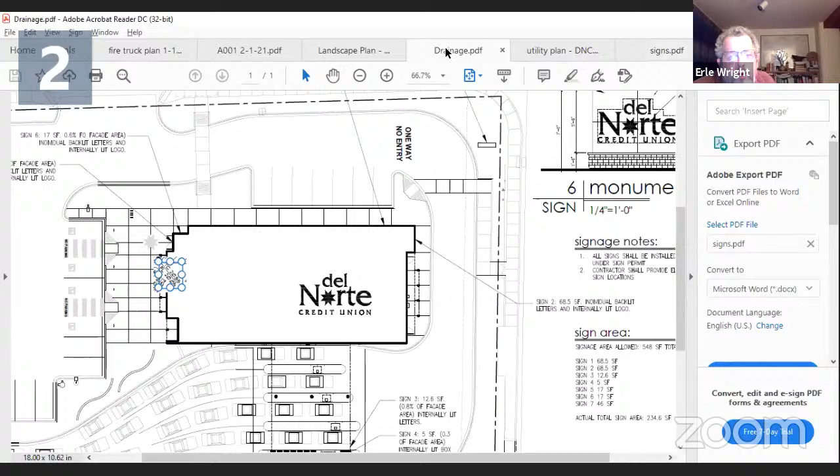Okay. And then my last one, and maybe I have to defer to Chairman Martinez on this, but I am concerned about the block wall over a water retention area. We talked about the maintenance, but also requiring that a waterproof barrier be installed in that retention pond, or is that part of the design of the retention pond itself?

I would assume it's going to percolate. So I'm concerned that the applicant may have liability issues going down the road if those properties to the west were impacted by leaching.

Certainly, and to the point you raised earlier with the engineer, both city and state requirements call for engineering of any wall greater than 4 feet tall. So this wall would have to not only be engineered, but would be permitted and inspected through CID as part of their commercial development, same as all other construction. I'm fairly certain that's going to be a requirement for them if this wall is retaining any portion of a potential basin. But that's definitely something we can keep on top of as we move forward.

Well, yeah, it's not the engineering that I'm concerned about. It's the leaching of moisture having a negative impact on those properties, and Del Norte Credit Union being liable to those property owners based on the decision made by the Planning Commission and allowed by the city.

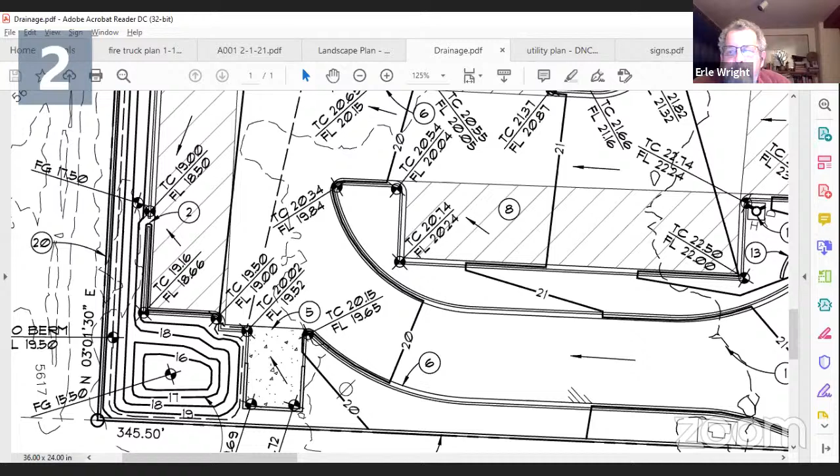I think, and again, because we've kind of done this backwards with the applicant presenting first, I believe it's important that we ask the applicant if these conditions of approval are acceptable. It's a little bit out of order, Mr. Chair, I apologize. No, I'm in favor of that. That's a good question. Would you want him to address that now? We can wait till a motion, but we've kind of discussed them already. Typically we do this after staff presents these conditions, and we ask that question, but I defer to the chair's preference.

Okay, I'll go ahead and ask the applicant if they're okay with the conditions and the changes as presented so far. We are. Thank you, Mr. Woodhour. Okay, Mr. Chair, I think that covers my questions.

Thank you, Commissioner, for staff. Thank you. Before we go on to questions from the applicant, I just wanted to ask staff if now was an appropriate time, since there's some additional information to include into the record for this case that was presented earlier today. We want to make sure we capture that and include it into the record. So if now's an appropriate time, we could.

Yep, absolutely. So a couple items: one was that email that I read a minute ago from Souter Miller, and then shared earlier with the commission was an email from Mr. Walla, which has been discussed, all those details. And then lastly, shared earlier with the commission was a petition to the city. We've got a couple folks that are going to speak to that and will be able to testify to the items in there.